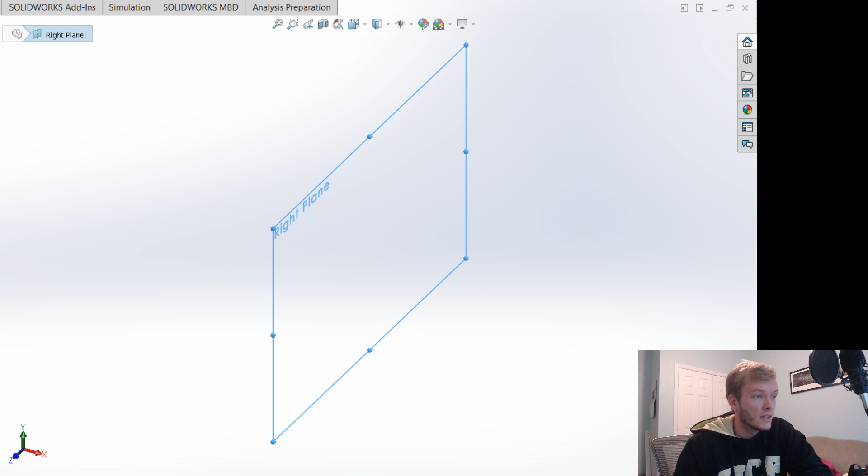So I'm going to go with the right plane to start us off. It's been a little bit since I've drawn anything in SolidWorks, so I'll have to get back into the swing of things, but it shouldn't be too difficult to get back on par. A lot of this is going to be fairly subjective - sometimes I'll measure just for proportionality's sake, but I need to make sure the proportions of the individual ships are fairly similar, which shouldn't be too hard.

What we're going to do is work this way. If I'm looking correctly at the dimensions, it looks like it's about the dimensions of a 2x4. 2x4s, if you don't know, aren't actually 2x4 - they're like 1.5 by 3.5. So we're gonna go 150. This is millimeters I believe, but we'll keep it that way, because base 10 is so much easier to work in.

It's probably gonna be a bunch of cuts and whatnot to get there. So we'll go ahead and extrude this, to see the actual distance. I'm thinking we're gonna go with just 350 as well, that way, to start it out. I'm debating whether I want to do that mid-plane, but I think it won't matter in the end.

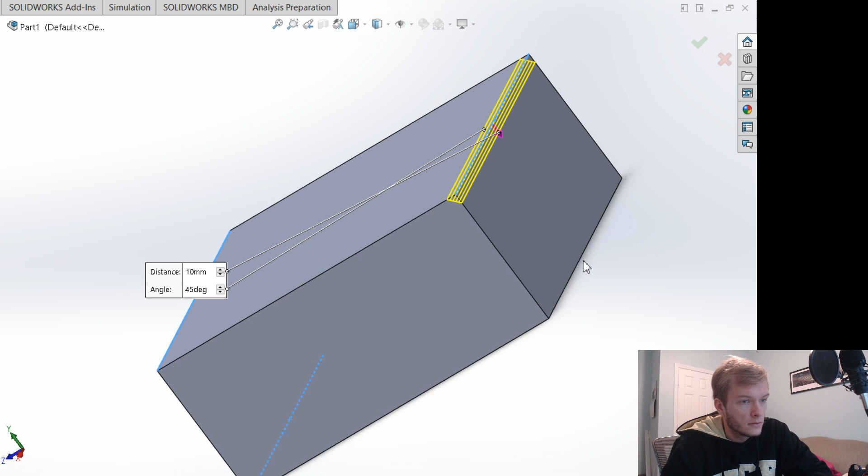That is pretty much where we are. So then I'm going to go ahead and take my chamfer tool, put one there, there - want to show full preview. Yeah, we're just going to crank this up until we get a point.

Do we need to go... so it's going to be 75. I should have just done the math on that. Okay, that's starting to look good.

Just trying to... I have my recording software over here next to it, so I can actually see pretty much next to the picture how it looks. So that's probably a good thing.

And then the front part is going to be the really weird part for me, and I think that's something we're going to have to mess around with. But the wings shouldn't be too bad - it's fairly flat in the back. Maybe we'll get the cockpit in here just to start it out.

So we're going to sketch on this surface, going normal to this surface. Alright, grab a corner to corner rectangle - it goes almost all the way to the front. Maybe... yeah, so we're going to do the actual pentagon shape. And I'm assuming the draft of it is also in the back as well, so that's an important part. So let me grab a center line.

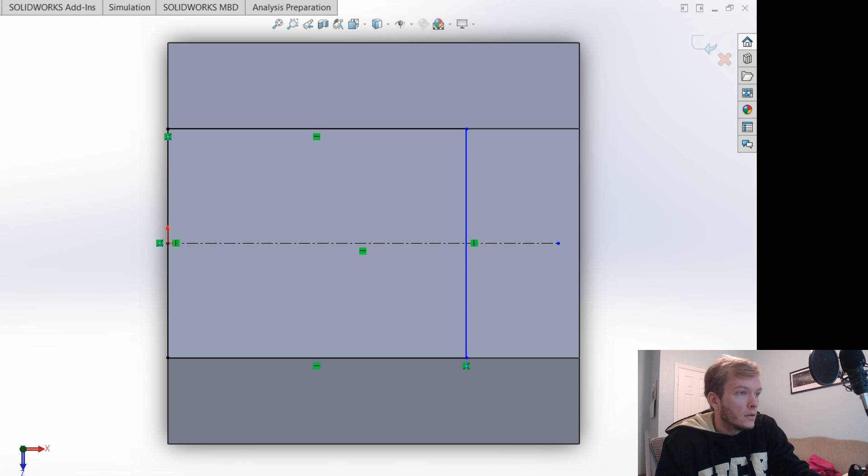There we go. Escape, regular line, there to there, and to there. Okay, I think that needs to be a little shallower, but we can easily drag this like so. Alright, and then we're going to define this distance just so it's happy. So we'll go ahead and make that 50, just to make it a nice number.

And then this distance then needs to be defined. We'll make that 70. Okay, so then everything's defined. It looks like we're going up about half, or maybe let's call it a third, the height. That'll give us a nice 50 extrude. So 50 millimeter. We're going to extrude that, and that for 50.

And then we also need to draft this guy inwards. So the front draft looks like it might actually be a little heavier than the rest of it.

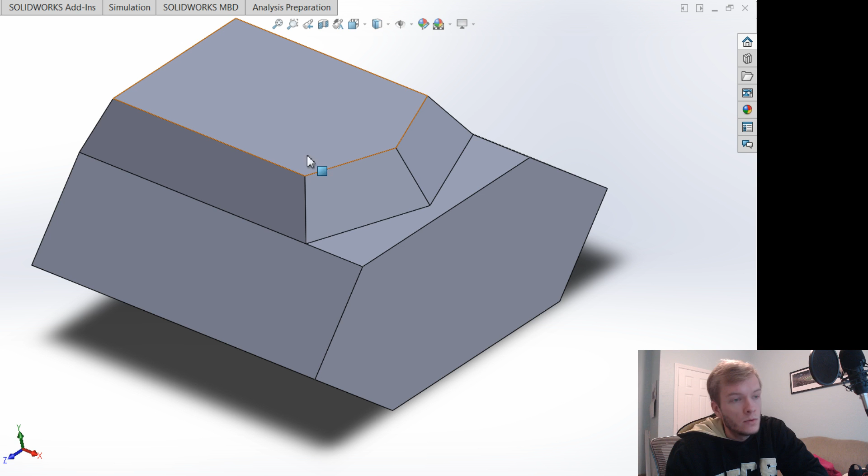And I think, so there's a cut on the front of this. We're going to leave it like this, I think. So we'll save that. So if I rotate it like that, that is actually looking pretty nice. So I have to get this cut in the front here. What I will probably do for the cut, I can't tell if that's really aesthetic or if that's actually gouged in there, but I'm going to assume it's gouged in.

There's no real need for aerodynamics in space, so sorry for eating my stream fuel on stream. But

So we're going to make a plane. It's taking its time. We need to go a little bit further down. 20 actually looks pretty good. So my goal with this is I'm going to draw a line from here to here on this plane. So I'm going to sketch on this plane and just get normal to it for sanity's sake. And so we're going to go.

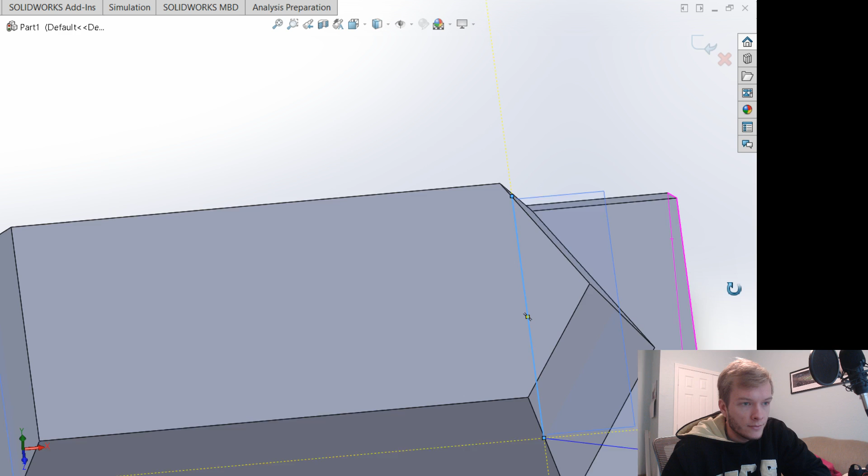Now I want to have it intersect with these, but I need it to be actually on the right spot of that plane, just for how I want it to look. So let me get this back to normal.

You can probably hear my dog barking in the background. What just happened? Alright, we're having some technical difficulties.

Alright, so we're gonna have to get this guy to be right where we want it. There we go. Pierce is what we want. Okay. And that should be at that level of 20. And we're actually going to extrude it downwards. We're going to extrude it, cut it downwards, but we're actually going to draft it as well. So let me get an angle on this.

It's really weird without the spatial manipulator mouse, just using the regular mouse. I had an internship where I was working with Solidworks, and I had the spatial manipulator mouse, but it's a big step changing from that.

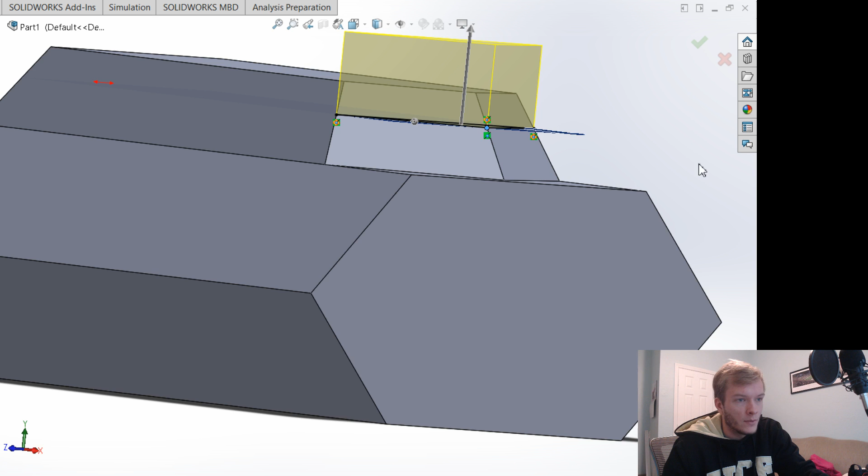So we need to flip that out, flip the side of the cut. I don't think anything changed, not sure why. Oh, no. Blind. Why are we doing that? Flip direction of the cut. Why isn't it flipping? Yeah. So I need this to... I don't know if that's going to work.

You know what? There's a better way to do this. I shouldn't have done it on that plane. Okay. We're gonna go. You can always give up. Alright, we don't need that plane either. So we're gonna do it on this one. So let's get normal to here. And then we're going to draw a line from there to there to there to there. Does that look like what we want it to? Probably. I think so. So let's make this some nice dimensions.

We said this was going to be 10, I believe. No, I don't like that. Let's make it 20. Yeah, okay. And then we're gonna make this guy here. We'll just make that one 10. Alright, and so that's defined. And we should be able to just cut it straight into the ship. So I think it's going to cause some problems, and that might be something that we need to deal with.

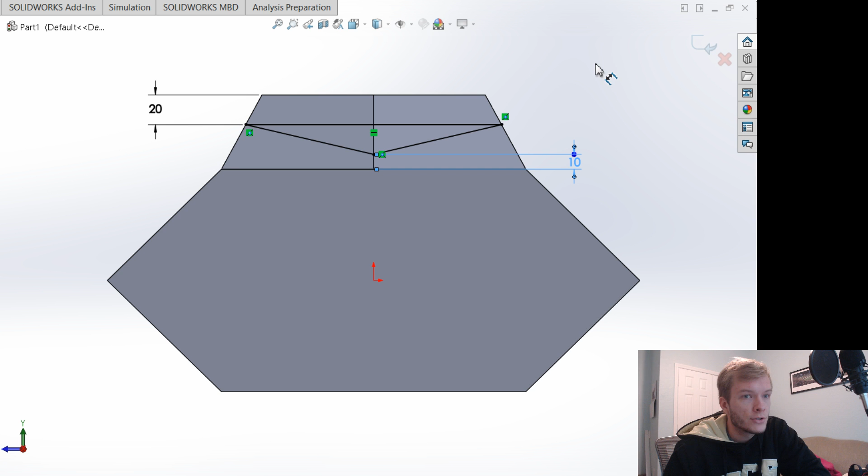So we'll see if it gets there. I need to make sure that it doesn't cut once it gets to this flat part up here. It needs to stop at that point. So I probably could make a plane for that to stop it, but we're going to cut this guy. We're gonna drag it.

Can I do... No, that's gonna go all the way through it. Up to vertex. I think that'll work. That'll look okay. There we go. That's actually looking really good. That's exactly what I want.

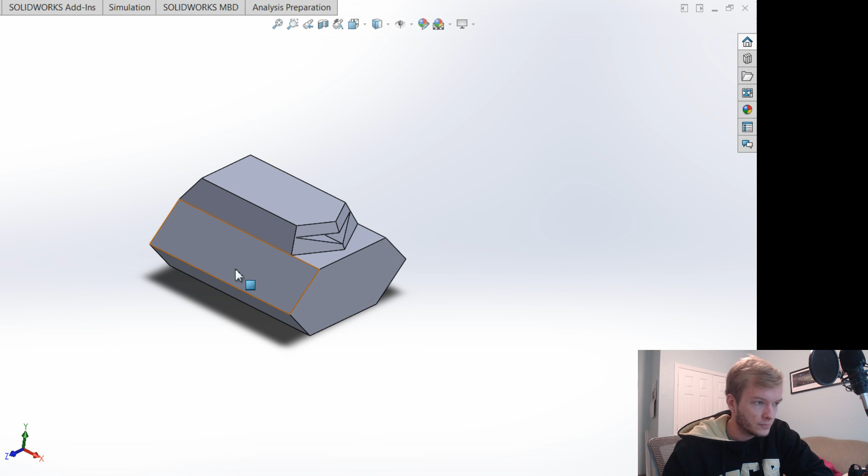So like I said, this front part is going to be really weird. I guess we can leave that for last, because it's basically going to be a bunch of extrudes all coming from this plane here. We should be able to make the wings fairly easily. Where's the front plane go, right down the middle? Yes, it does. Perfect. Okay, so we need to... We can probably do it on the front plane. I'll just have to play around with it.

No, actually we can't, because of the way that it sits. So it sits nicely on the back. I guess I could do it and then lop it off later. That wouldn't be too difficult to work with. Yeah. Alright, we can do that. So let's go to the front plane. We're gonna get normal to that. And basically what we need to do is we need to make the wing too big.

So the wing is a... it's kind of like a hexagon shape if you look at it the right direction. So it's gonna take some playing around with. So I'm gonna leave it undefined. So I can probably make this a little bit easier on myself. So we're gonna get some sort of... Okay, we're gonna delete that for one. We're gonna get a center line in here.

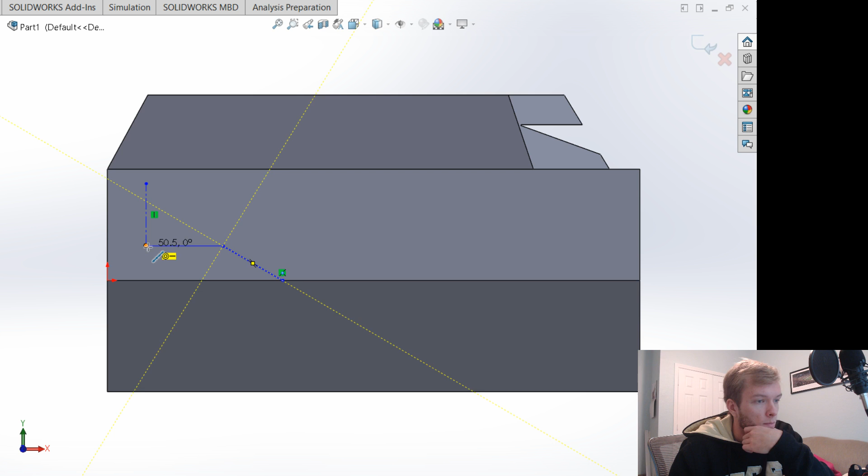And so let's bring this from here to here, and we're going to do a bunch of mirrors because it's symmetric. Mirror entities to mirror about this guy, good. And then mirror entities to mirror all of these about this guy. Good. So if I move this, no, that's not how that works.

And like I said, we need to make this too big. So it looks like it goes to about half the distance of this. So let's grab that center point. I hit escape instead of control. Make those coincident. And so it's gonna be, if we do it this way, it's gonna be a little bit less than half. I don't think that's the worst thing in the world. Yeah, we'll live with it.

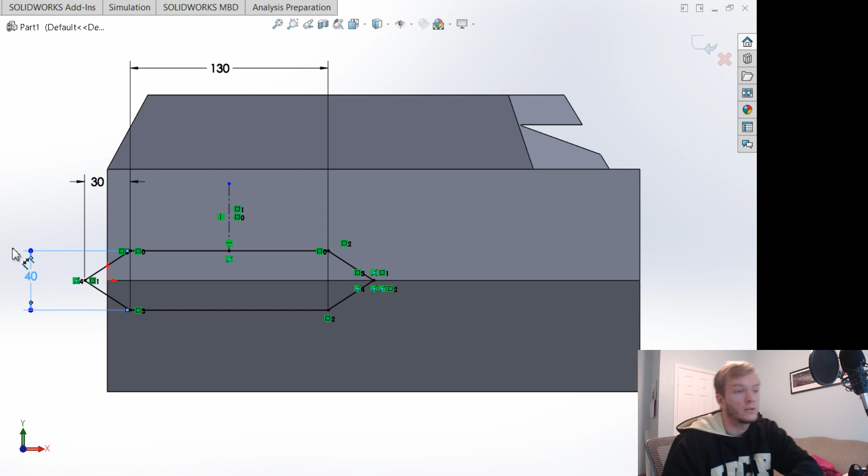So let me just get this extruded. So we're gonna get these situated. Let's go 130 to start it out, and then this is going to be 30, and that is going to be 40, and we'll just see how this looks. So let's extrude this. It's going to be mid-plane. It's going to be drafted. Not nearly as much.

This is going to be, I think it's going to be 3 times as wide as the entire body of the ship itself. So 3 times as wide. It's going to be 350 times 3, so 1050, and then we gotta crank down these degrees until that happens. But I don't think that's enough by itself. So something like that.

I think the problem here is that we need a bigger draft in the width department than we need in the length department. So it's sitting about where we want it to be. But maybe what we should do is we should just draft a rectangle, and then we can put some chamfers on it. I think that's a better idea. So we're going to cancel this, go back to our drawing. So we're going to delete that guy, delete that guy, delete that guy, delete that guy.

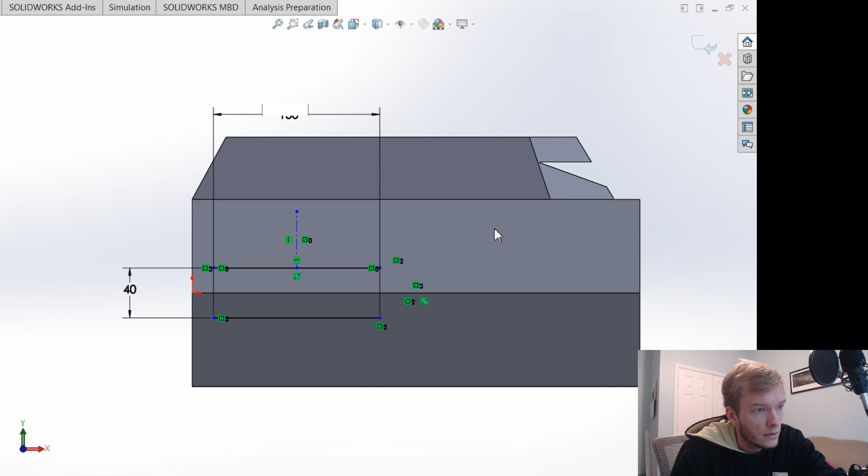So we need to delete that while we're at it. Okay. And then finish out this rectangle. Make that coincident. Drag this puppy out here. I guess we're gonna make it like 150 now, or 200. All right. So now that's defined.

We can extrude that the way I was doing it before, where this is gonna be 1050. Enter. Mid-plane. We need it mid-plane, because it's midway through the plane. Then crank this down. Alright. That's starting to look like we wanted it to. And then we're gonna shove a bunch of chamfers on it. So I think that's about what we want.

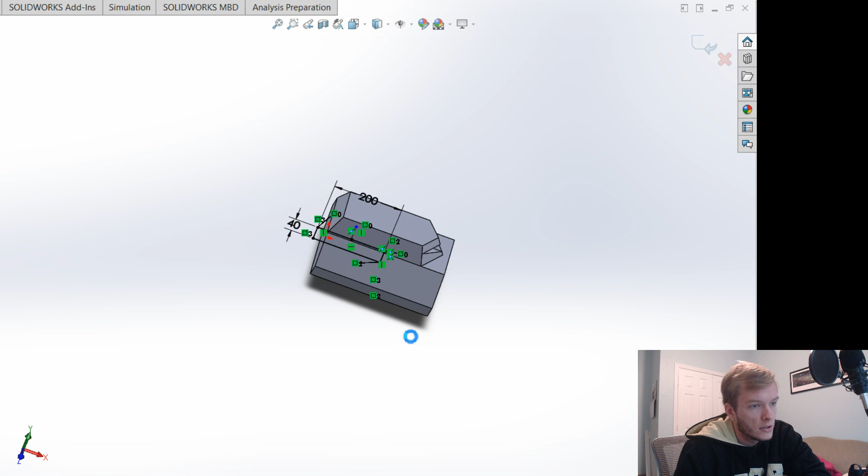Yeah, we may have to do some extra cutting to this, but we'll see how this looks. So it does look like we need to shorten it though. So we're going to save it, but then we're going to go back into it, edit sketch. This is going to be 190. What we're looking for is we want this to be lined up with this here. So we gotta just keep edging off until it lines up the way we want it to. So this is gonna be 185. See how that looks. It's closer. It's real close.

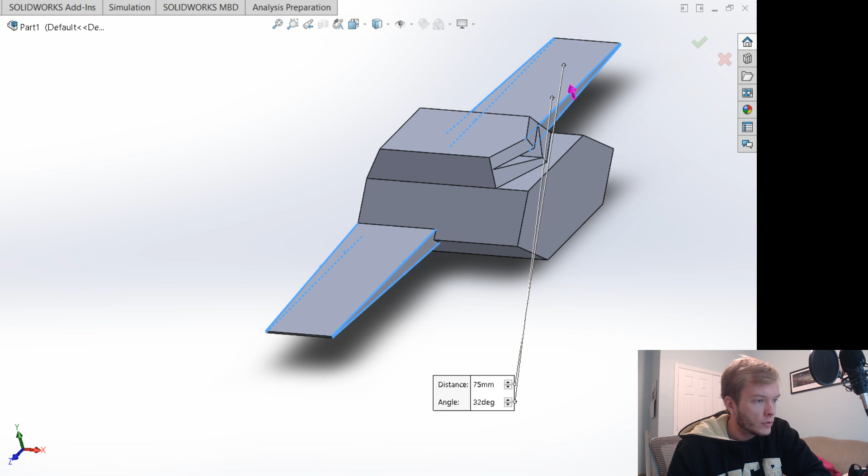Okay. So it doesn't look like it's 45. Looks like it might even be a little steeper than that. Or, I guess, shallower. So we'll go to 30. And then we gotta crank this all the way down. I'm realizing I might need to make the cuts before I do this. Okay.

I wonder, I can probably draft just certain faces. That would make sense. How does that look? Not nearly how we want it to. And also, that doesn't line up. What's wrong with that? Is that on all of them? Yeah, that's weird. Alright. Now, correct me if I'm wrong, it could be flat. I think that could be something.

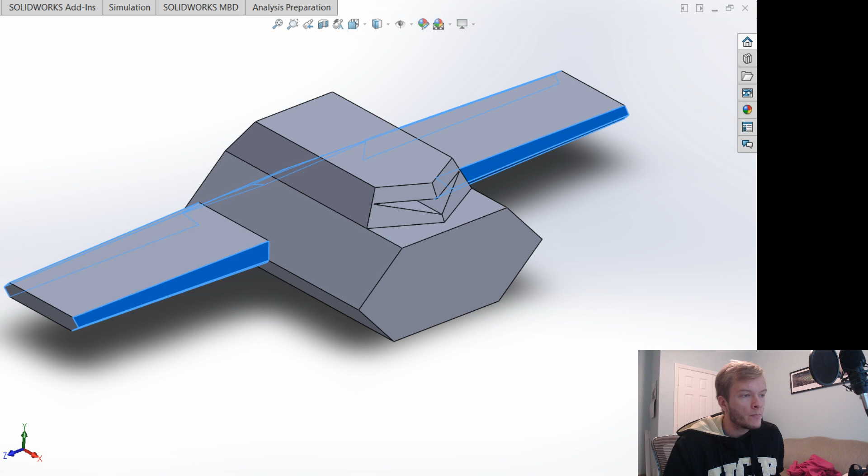Okay. So, screw these. Completely remove the draft. All of it. We're going to go to surface there. And we're going to cut. We're going to like draft outwards. It's gonna be interesting. We'll see how it goes. Okay.

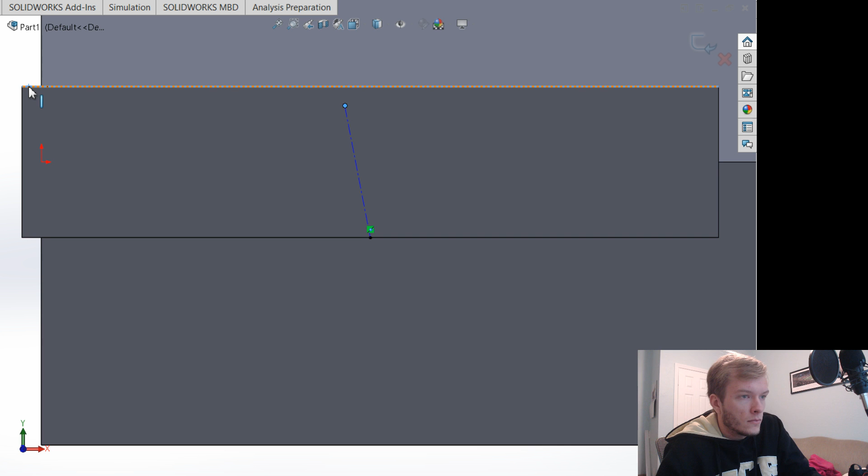Alright, we need to make this as skinny as we want it. So I'm gonna start with. Well, let me get these center lines in here. What? Okay, there we go. So that's there. This goes here. There we go.

And so what we're gonna do is we're gonna get this box into the sketch, and then we're gonna get, we don't want that. I might have to make just a huge box. Yeah, we can do that. Yeah, I'm just going to leave that undefined so I can mess around with it if I need to. Because the goal is I'm going to shrink it in and have the hole in the middle expand outwards.

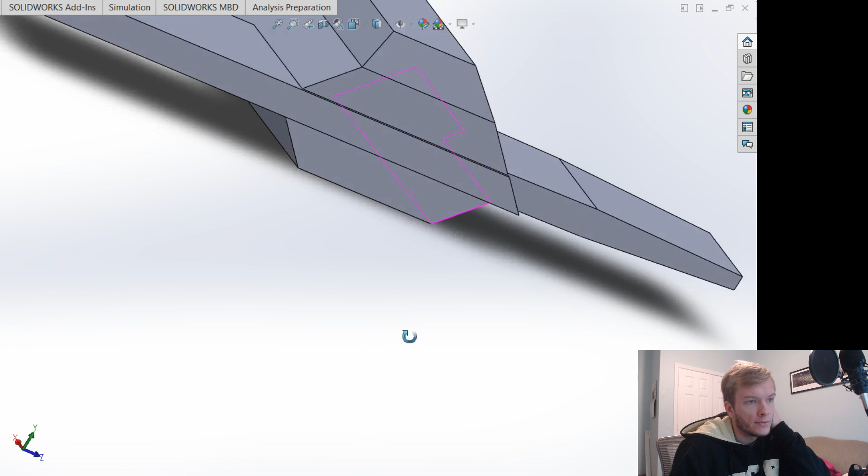Okay, so like I said, I have to do this twice. But that does look to be what we're aiming for. I don't really like that line there, but something we're gonna have to live with. Okay. All right.

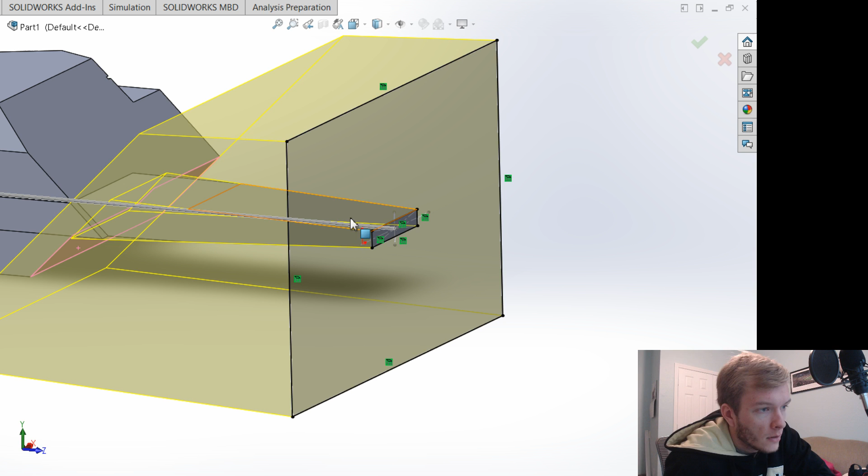Okay. So this will hopefully get me the other side. Okay. That's one wing down. And maybe we can even help it out on the other side. But I'm gonna get the chamfer in. And then we'll just copy the whole thing over to the other side. Ooh, that's what I could do. I could, yeah, I'll do that.

So this whole boss extrude, we're gonna go back to it. We're gonna cut this number in half. So that's gonna be 525. And then we're gonna go blind. Keep it that way. Go back into the feature. And we'll just work on it on this side, and then we'll go over to the other side and figure it out from there. So I still don't like that angle, but I can't really think of any better way to do it. It's considering this all one thing, so maybe we can work with it.

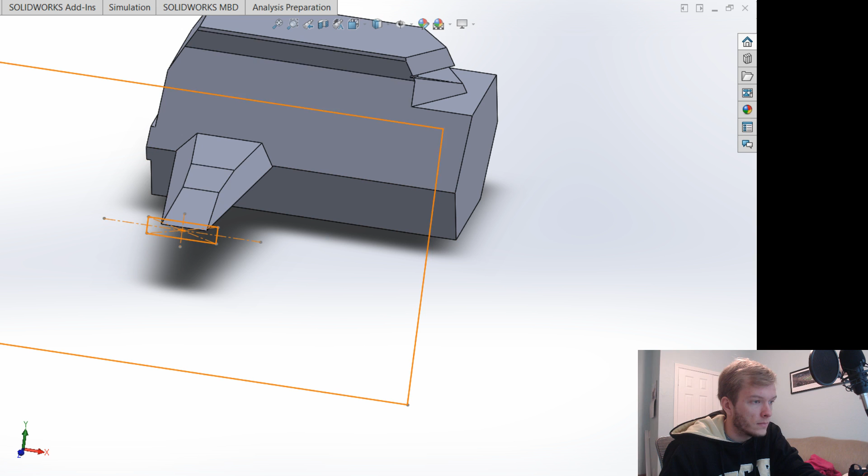We need to go a little steeper. See how that looks. Makes me think that this cut could maybe be a little bit steeper in a sense. Okay. So if we make this 50, then we gotta make the cut extrude wider.

What? Oh, these chamfers are messed up. Okay, we're gonna delete the chamfers and redo them. I'm working on it. I'm gonna make this 6, right? 6.5. Nah, it was 6.5. Okay.

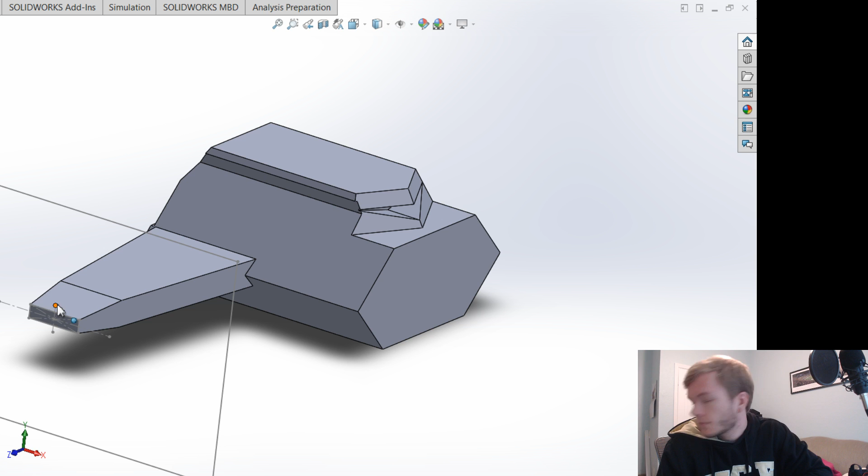Okay. And hopefully this will get rid of itself when we go to do the chamfers. So, okay.

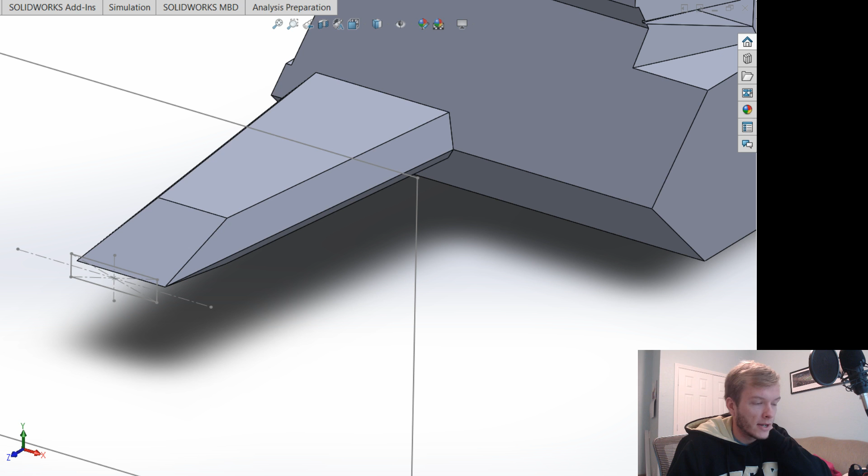That's what we're looking for. All right. I think that's about as good as it's gonna get. What could I do? I can crank the chamfers up a little bit more. Actually, I think what I can do is I can go to this guy, sketch, make that just a little bit smaller. So if we make that 60, no, we need less than that. So 55. Okay.

Okay, and then so on these first chamfers, I think we need to make these go deeper.

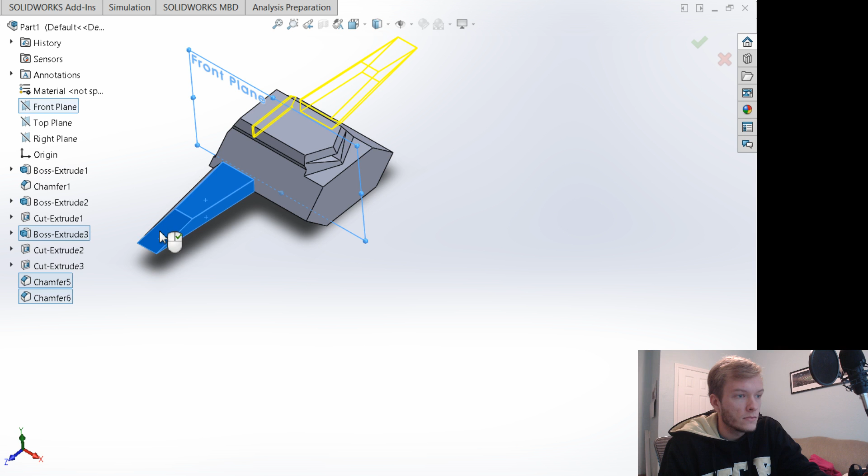Feature to mirror, we are going to get that. I'm just gonna click on all of them. Oh, so it's already got them. Okay. Let me see how that looks. Rebuild errors. Okay. What's going on here? Okay. I guess we're just going to have to recreate these chamfers on the other side. I don't know what's going on with that, and I don't feel like dealing with it.

So this is 254.2 at 1 degree. Oh, that's why, okay. I can't make those chamfers unless I have the cuts. So let me go to this mirror. So I need the cuts and the chamfers. There we go. Still causing problems. Great.

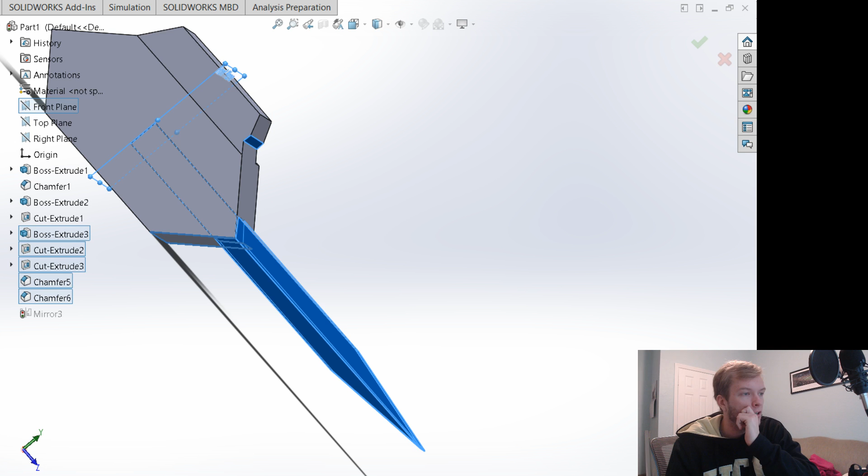Oh, did that actually cut a little piece right there? That's annoying. I didn't even realize that. I mean, it doesn't look that bad, but it's not what we wanted. Let me go back to that spot. Okay, so that's where that happened.

So this needs to be, if I go to the sketch, if I drag that in a bit, does that still work? Yeah, that still works. Alright, we're going to delete that mirror. Don't know why it's causing so much problems. Front plane.

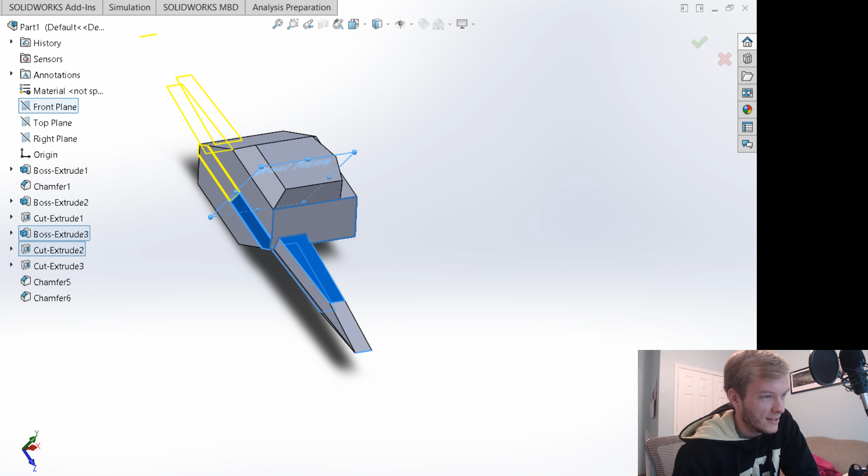Okay. I guess I could just go through and recreate all of it. So let me just mirror the one thing that works. Can I mirror some of the cut extrudes? No. No. Okay. Well, we're gonna just go do it on this side, I guess.

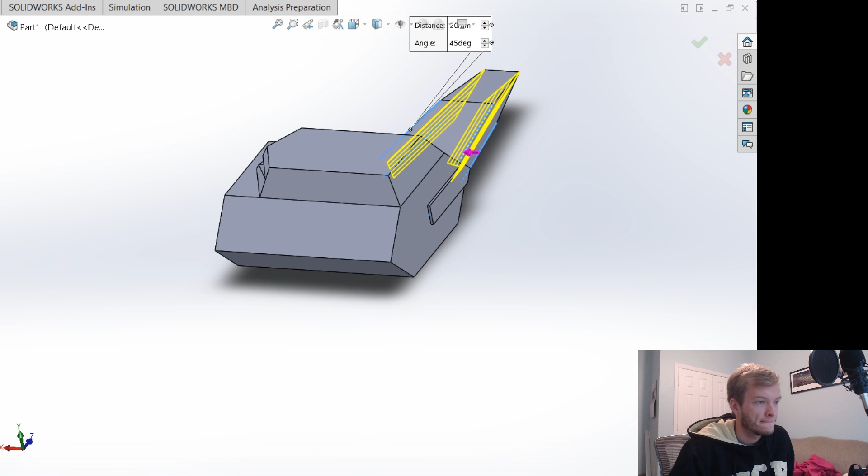That one's stupid, so let's see, what was that? That's 554.2 with 1 degree. Oh, luckily it kept it. That's nice. Okay, and then we'll go get this one. 20 with 45. So chamfer.

Right. What do you think so far, Cicada? Is that looking like it's starting to fill out? I just got to get the front on, which is going to be a little interesting, but we'll see how that goes. It's going to be a lot of angles. Oh, I gotta take that off the back.

Why can't I sketch on that? I'll go to the bottom. Oh, I'm in a sketch.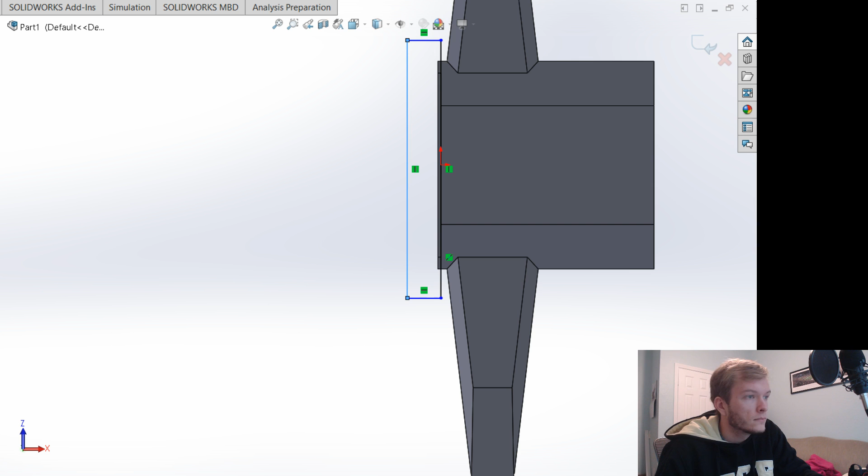Okay. Don't need it to be that much, but I can probably go 100. No, that's 10. Yeah, there we go. Clean that off the back end. There we go. Just realized that the picture I'm looking at is almost a perfect isometric view. That's pretty nice.

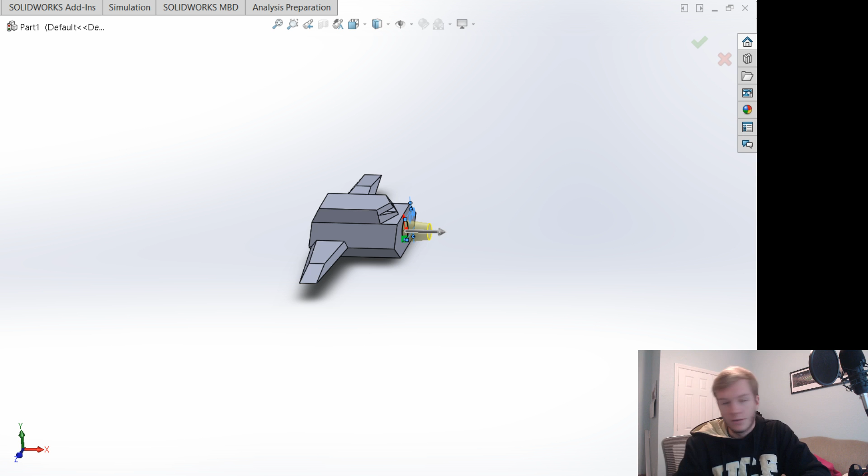This front part is going to be a mess. You can put that big horn on the front pretty easily. It's actually a decent decline. I'm gonna have to make this longer though.

I'm gonna make this 4. Up to 600. Okay. So now we need to sketch on here again. So I'm trying to get some comprehension of this. It looks like what I can do.

Debating whether I should make like a big piece and then cut away from it. I feel like I have to. Like it's gonna be a bunch of different extrudes and cuts to get here. We can make that middle part maybe. Yeah, that looks easy enough. It's kind of menacing.

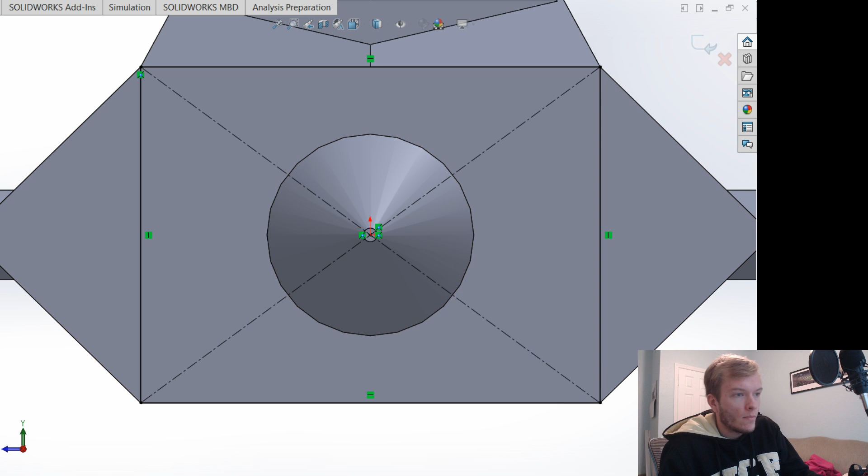So that's 600. We gotta go like 250, maybe a little less. And then crank that up.

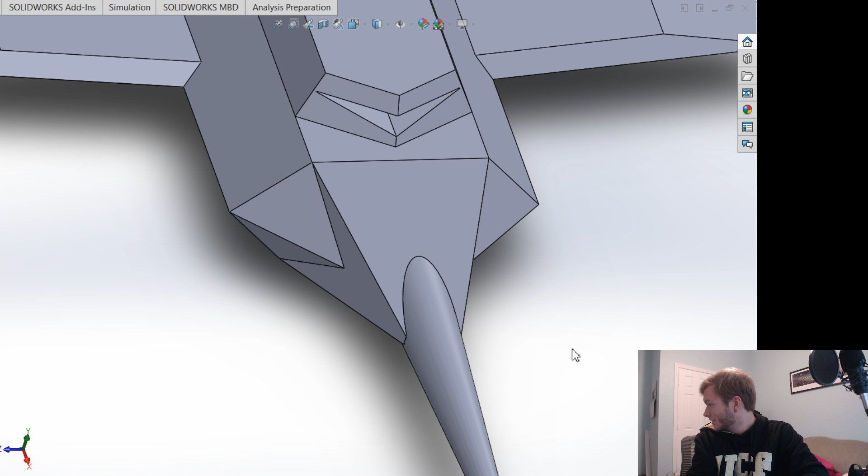It's going to 200. We want it to go to 200? No, we want it to go to like 100. And then crank it in more. There we go. Is that? Ah, so close. Should have just gone to 40. That would have been a nice number. That's already starting to look like what I wanted it to. But there's still some weird angles on this. Maybe I can get away with some chamfers.

Oh yeah, yeah. I don't know, man. I'm hoping that there's nothing stopping them from getting home with it. But I guess it did take a lot of damage.

Yeah, let's go for the. Okay. Why is that? Why is it cutting into over there so much? What is that doing? It's something I could do.

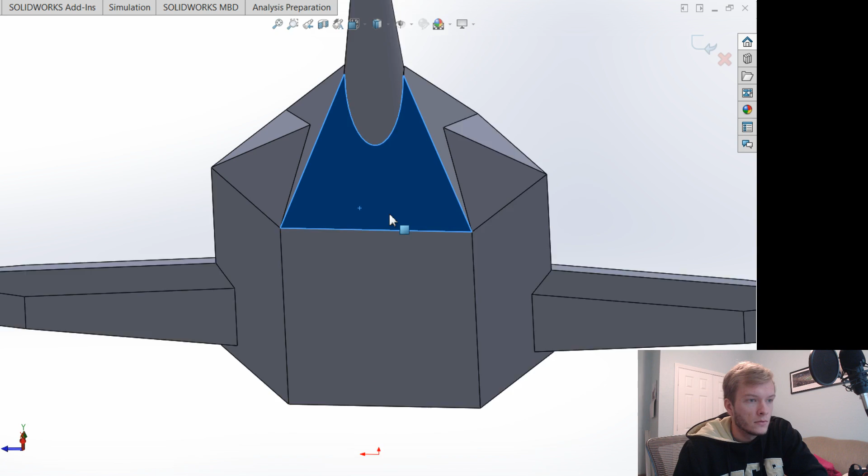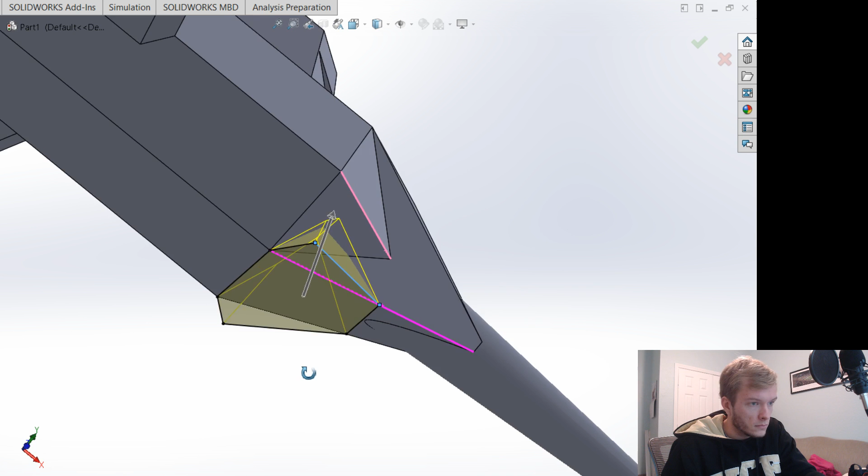It's almost like I need to sketch on this plane. I don't know how this is gonna look. No, I don't like that.

I actually just Google searched the most recent episode, or I Google searched Sun Incinerator or something, and I have a little image that popped up. I think it might be because somebody's taken out the background, so I don't know if that's something that was used on the wiki, but I think I might end up calling it here because it looks pretty close, and I don't know that I can understand the angles from just the image that I have, so may leave it up to someone else to continue the legend.

But I gotta say that I'm pretty satisfied with how it turned out. I can do a little turn. So I wanted to try and do the rest of them. At least the big one, Emerald Ship. So let me save this one off. I don't know if it's dangerous to save something as Sun Incinerator on my documents, but we'll cross that bridge when we get there. Alright, so I'm going to leave that one open. We're going to go to a new one.

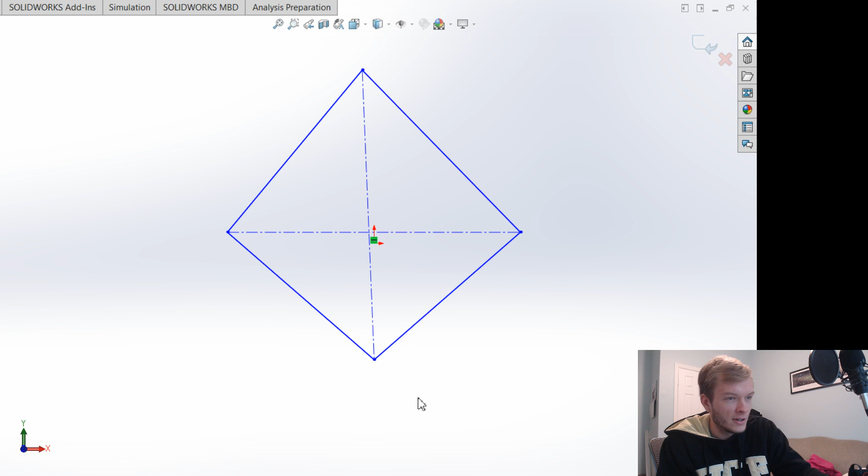Alright, from my perspective, this looks like a square, so that's what we're going to do. Alright, so the previous ship was 150, so it was 15 centimeters tall. For scaling purposes, we're going to make this one massive. So, this one needs to be like 20 times that. So 3,000?

Oh, hold on, I gotta hit control. Coincident. Okay. So that is what we're working with, and then we're going to extrude this. We're going to go mid-plane. We just make this a big tetrahedron. So what's going on here?

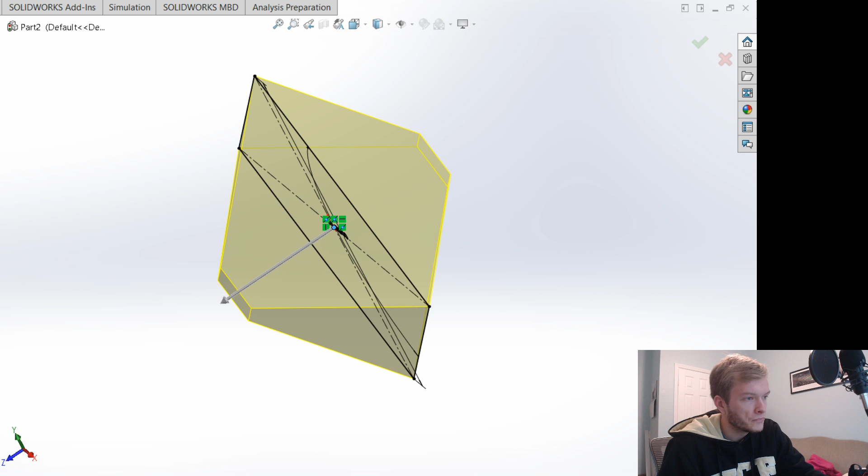Probably do the math on this. Is it going to go out to like 2,000 or something? Nope. That's a... Alright. Don't know what's going on there, but I think this is looking like what I wanted it to. So we'll accept that. Actually, let me look at it head on. So

we're gonna make a plane, not the airplane that I can hear outside, but the geometric plane. This offset's gonna be 1500. And a sketch on that. Looks to be about maybe a third of the way down. So if I get a sketch out, we're gonna go like that.

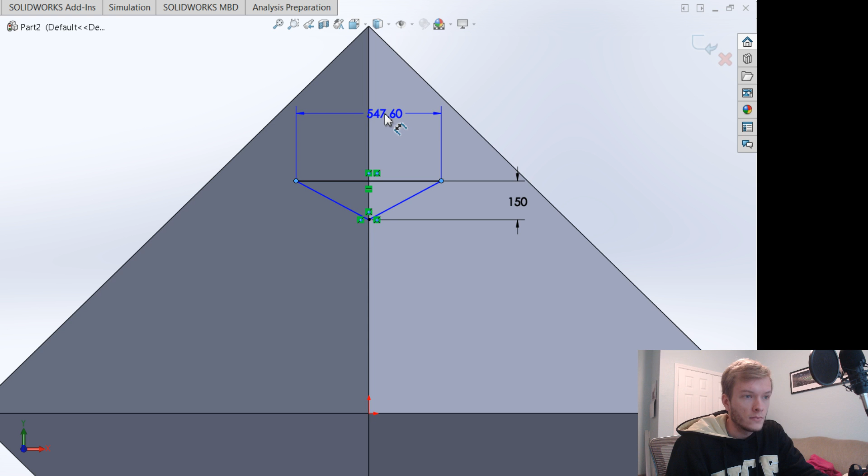Alright, this one, we're going to make that coincident. And then I'm just going to make these reasonable numbers. So I think that one's good. We'll call that one 150. And then we're going to call this one... we need to make it a little bit bigger, so let's go to 600. Alright, so we'll extrude cut that one. Just need to make sure it cuts into it.

Okay. If we go like that, then we get that shape we were looking for. Yeah, we'll try and make this a nice little scene when we get around to it.

Okay, so the arms are going to be a little interesting. Trying to think of how I want to do this, because they're at 45-degree angles, so from the normal sense. So I have to make, I'm gonna have to make a plane.

So if I go to the top plane and I make it... if I make it well, we're not gonna move it, we're gonna rotate it 45 degrees. And then our second reference is going to be that point, and our third reference is going to be that point. There we go.

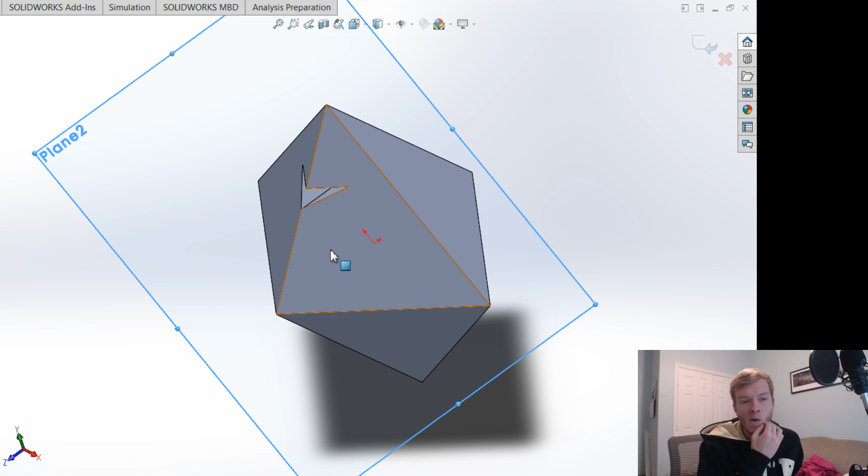Are you saying it's like less steep in the back? Because I know it's got the arms on the back that are the weapons. Yeah, maybe I can do that, maybe I can cut a little off the back. Because right now that's what it looks like from the side. Part of me thinks that it should be a little bit longer in the front. Maybe I can work with that.

Let me... oh, I gotta... Alright, it's gonna be symmetric, and then I'll have to.

Oh yeah, probably doesn't let you send a link or anything. You might be able to message it to me on Reddit if you had the Reddit thing.

There we go. Oh, I probably could have guessed that. That's a normal thing.

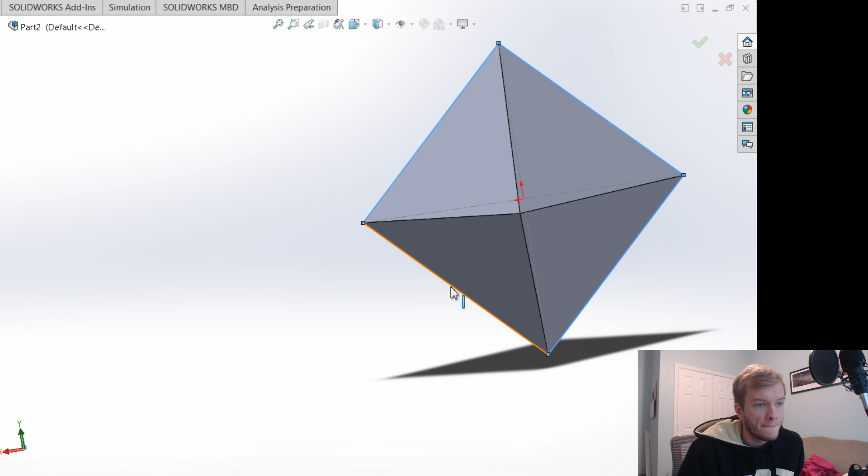Extrude cut. Gonna draft it. Oh god, draft outwards, please.

Like that, that's what I was thinking.

I just saw the Reddit thing. Alright, yeah, I'll check that in a second. We're gonna go to 50. Alright, yeah, I'll go check out this picture. Hold on.

Oh yeah. Okay, so it's a lot longer in the front. Yeah, you're right, I still think there should be a little bit in the back like this, but what I can do is I can make it a lot longer the way I did it.

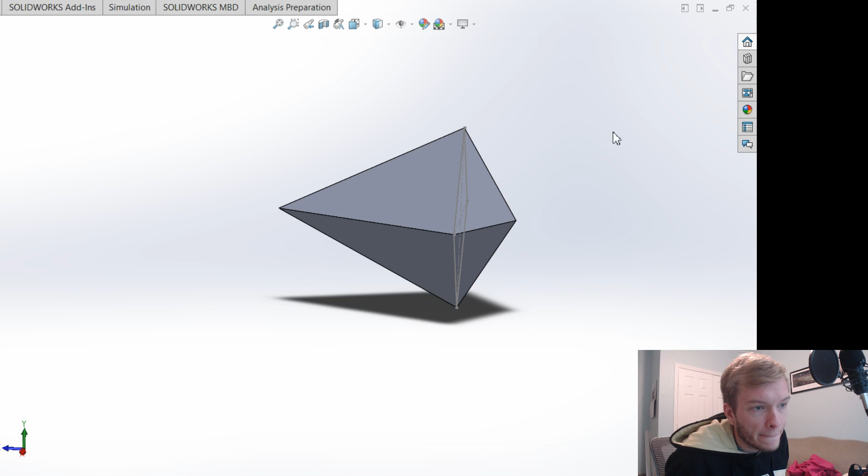Does that look better? I think that looks better. That definitely looks more aerodynamic, I'll give you that.

It's pretty menacing. Plane 2 is having some problems. Oh, because that point's gone. Yeah.

Alright, we're back. Okay, so I think I can get that out of there. And so what I'm going to do is I'm going to make one arm, and I'll try to rotate it around. That would make my life easy, but I don't know if that's going to work out. So I think it's going to be just...

Don't know what that was. Another message.

Oh wow, that's a nice back view. Okay, yeah, yeah, we can add that on. Thank you for the pictures, this is really helpful. Yeah, so it's got like a thruster spot in the back. Yeah, that makes sense.

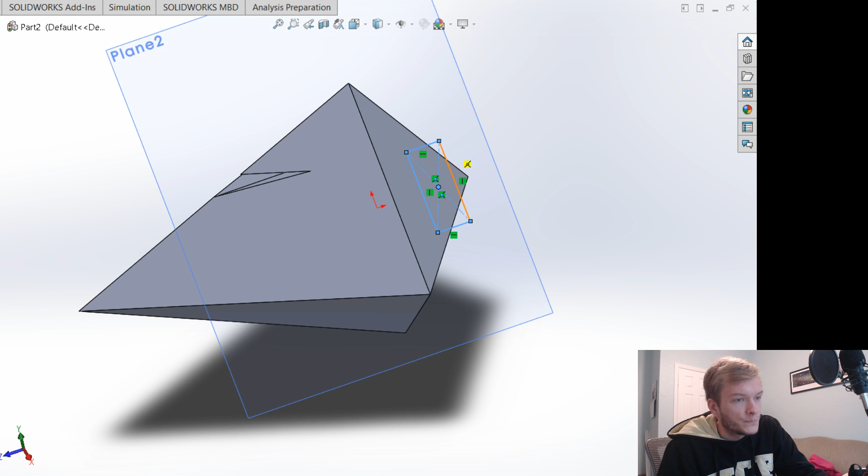Um, okay. So... my name's not Bob.

Alright, so let me just see what these are looking like. Go 150. And then 500.

I'm gonna put a center line from there to there. Get this guy lined up on the line. And then, what does that look like? 250 to me. We can adjust that later if it looks bad, but I don't think it'll look too bad.

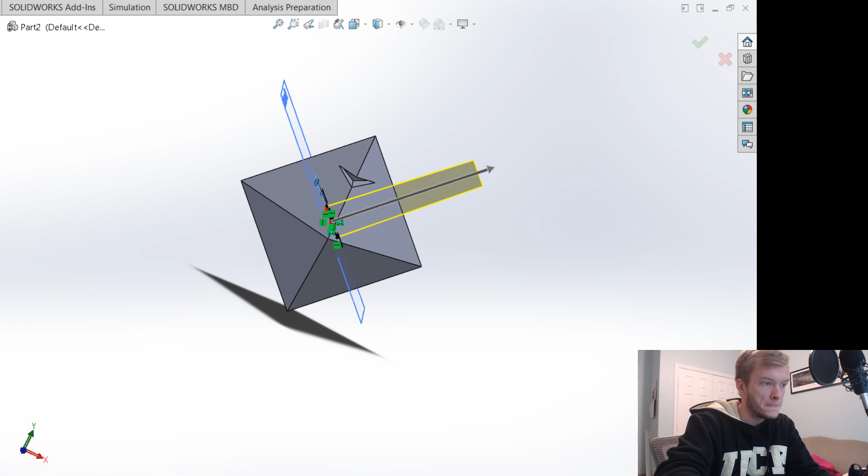Alright, and these go out pretty far. Maybe we'll go back to 1 degree. 3,000. Maybe even more than that. We'll go 3250. Alright, we're gonna live with that for a second.

See how it pans out. So if I go to Control 7, oh, I forgot, I gotta have that weird front view to match the shape that I got. Might even be no, I think that's the right length for it.

Okay. Because the weapons themselves are kind of pointed inwards, so it's a weird angle. To get it, I'm gonna have to play around with it, I think. Yeah, that's what I can do. Let me get that plane angle, second reference. We're gonna make it.

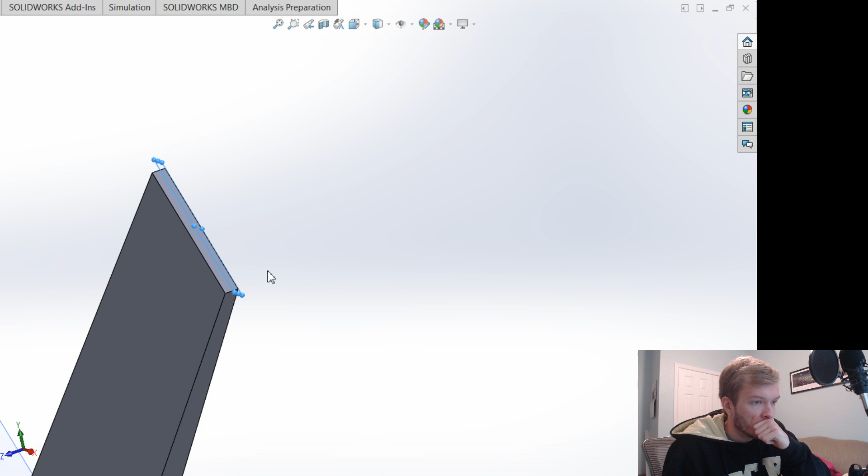We'll go 45. So if I get this here, yeah, if we sketch on this plane, and make that hidden. We'll go normal. Can hear the chainsaws are at it again.

What? There we go. Make that 150. And then the other way, make it 200, not enough, 400, maybe we can go 500, and then we're going to draft it inwards, crank that up.

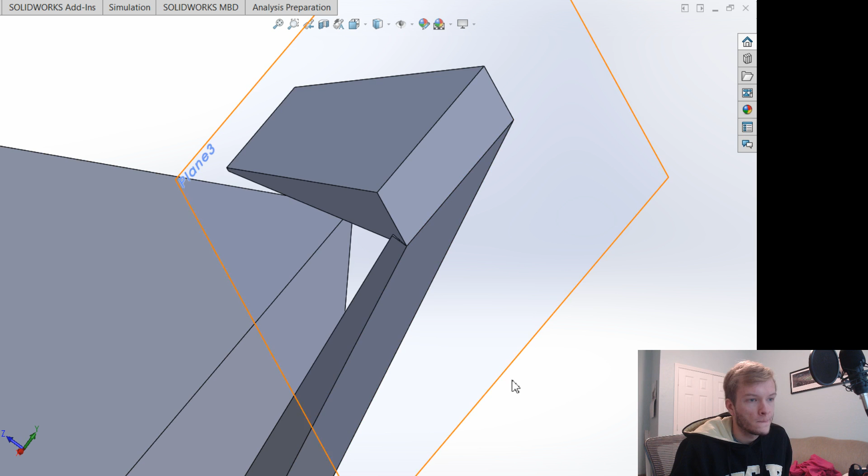So I think that looks like what I wanted it to, other than the fact that this needs to go inwards. So maybe I can cut it. Yeah, okay, we'll do that. From there, there, to there, to there. No, not a circle. There to there.

And then we're gonna not extrude, cut. To surface. That one. How does that look? Oh, I did it the wrong way. Okay.

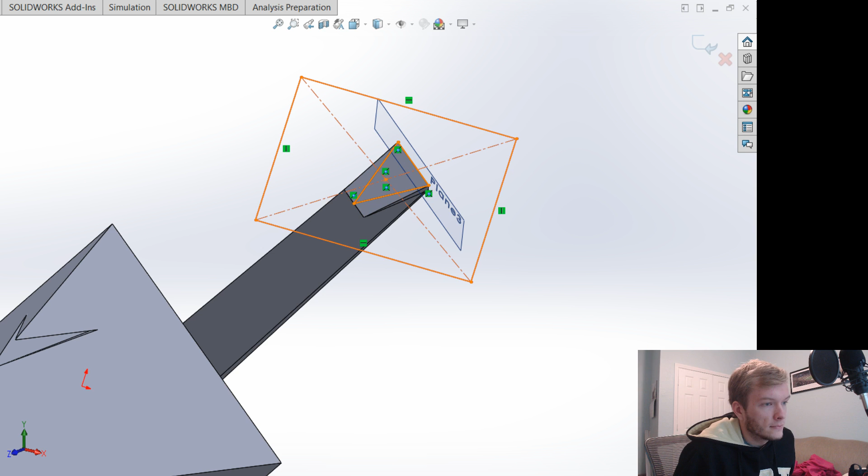Alright, we need to box this guy in. Alright. Hey, it worked. Doesn't look the prettiest right there on the edges, but I think I can chamfer those edges because in the back view it looks like it does have angles on them, so.

Alright, so this needs to be like 100. And then yeah, that looks a lot better, doesn't it? This needs to be less, more. We'll just look at it, how it looks. That looks weird, but I kind of like it. I don't think it's what we're going for, though. I think I need to take some off.

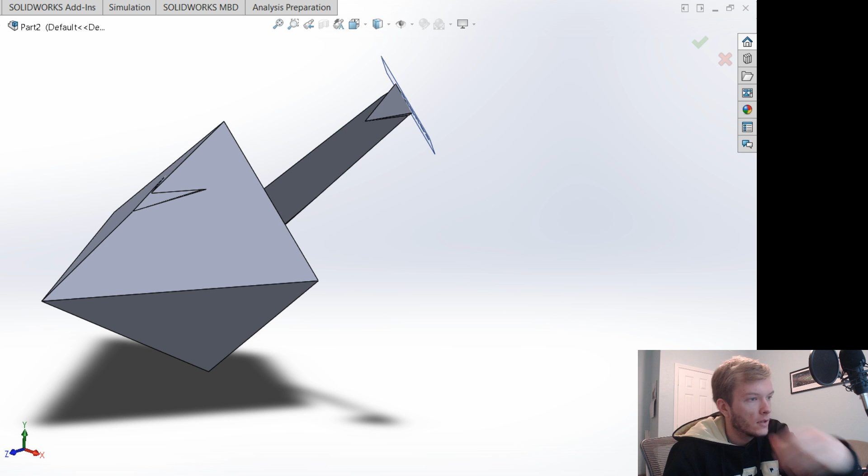I think that looks pretty good. Okay. Alright, let me see if I can rotate this guy around. Let me try and get a center line in here. I'm going for circular pattern, not the chamfer. I need to make the axis for this. I always get confused about that.

Alright, so if I go circular pattern, about that, and then alright, we want 4 of them. Why doesn't it work? What's wrong with it? I really don't want to have to do this 4 times.

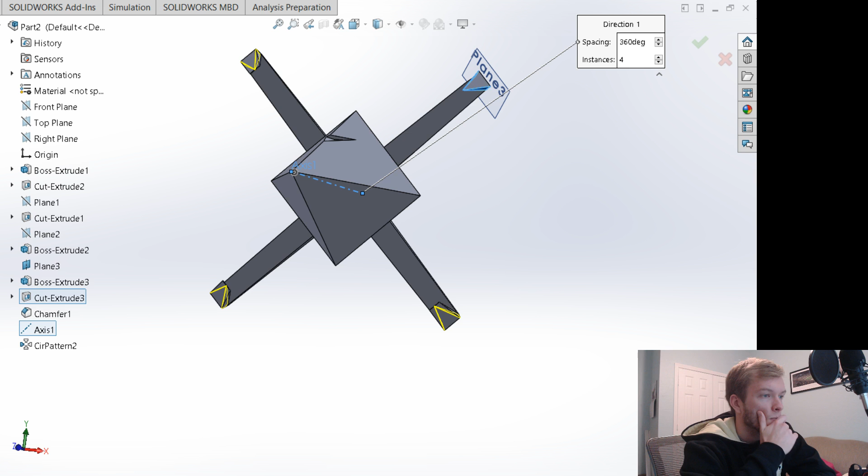Okay, that worked. So what do I need to do? I need to put the cut and the chamfer on them. Can I do another circular pattern maybe and get that? I don't know why it's not working whenever I put them on. So maybe I have to do it in a separate order. End face cannot terminate the extrude feature. Please recreate the feature using geometry pattern option if intended to mirror pattern and feature onto disjointed body. It's not... what? Okay. Well, it's easy enough to recreate what we did, so I'm gonna just do it 3 more times, I guess.

I'm being FaceTimed.

Hey, I'm still streaming. Oh, sorry. It's all good. That was my girlfriend. I'm sure she'll be here in a little bit, but okay, yeah, we're good there.

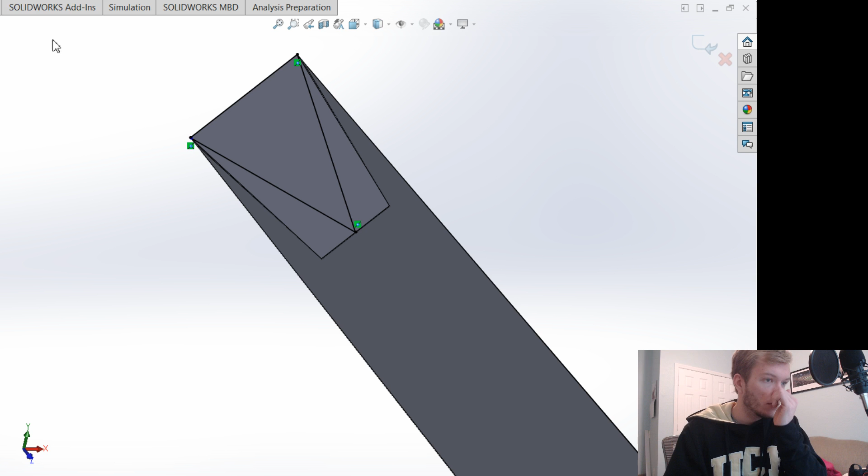Alright, we are good with that sketch, so, oh, okay. So what I did was I did that, that, that, and that. And then I cut it. Oh, no, I need to draw the box first. Extruded cut. Up to surface. That one. Alright.

Yeah, I might be able to go back and fix that if that is a problem. What did I do on the previous one that's not working here? Do I have to do it wrong first? I did that last time. Like that? There we go.

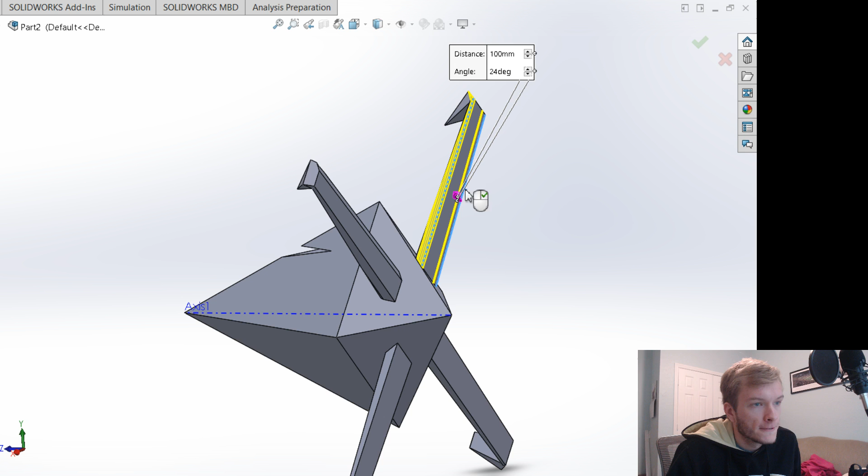And then the chamfer, what was the chamfer? 100, 24, okay. So, okay, that's one. Two more to go.

This one's not giving me any problems. I don't understand. I don't know what was going on with that one. Maybe it was the size of the box I made.

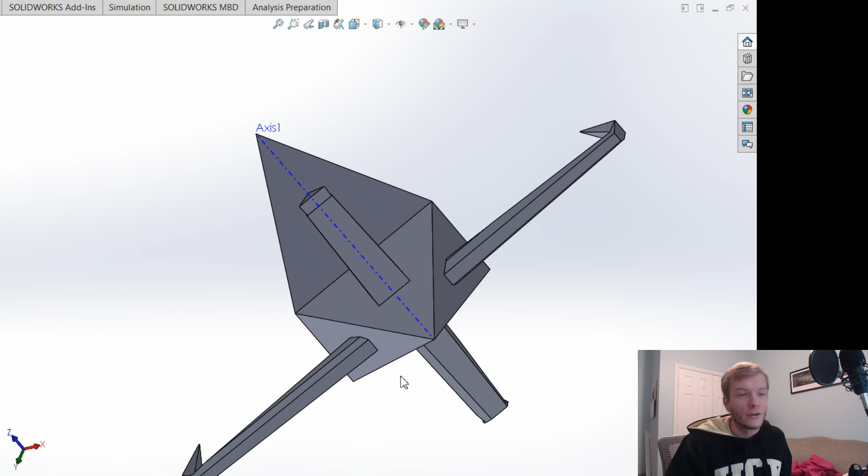Right. Alright, we do need to add that thruster cavity on the back. That actually did give a back angle of the Sun Incinerator, but it's just a bunch of circles, so I don't think I'll... You know what? We'll finish it off by adding those in, because that's a necessary feature for such a fine craft. Oh, not that one.

Okay, so we were saying that the arms looked a little long. Maybe I can fix that.

If I go to this guy, edit... sketch, yeah, edit feature, we can make that back down to 3,000. That didn't ruin anything, I don't think. Yeah, I think that turned out pretty nice.

So I need to cut that, cut the butt off. What I can do is grab the front plane and make a reference plane that's offset in the other direction.

How far off? We need to go like 300? No, we need to go like 500. Maybe a little bit more, 550. There we go.

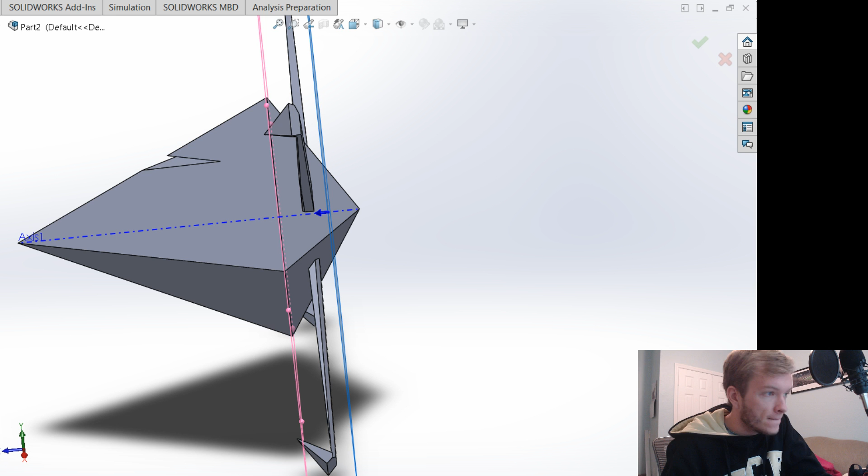So we're gonna sketch on here, go normal to that, other way. Alright, this is gonna be interesting because I gotta get this to line up with these, but also the plane.

I think I can use the pierce tool. Yeah. Alright, that fixed it nicely for me. And we're just going to extrude cut that way. That does it fine.

And on here, I'm gonna... oh, I can make this nice and easy for me.

Hey, we got more people. Michael Harmon, welcome to the stream.

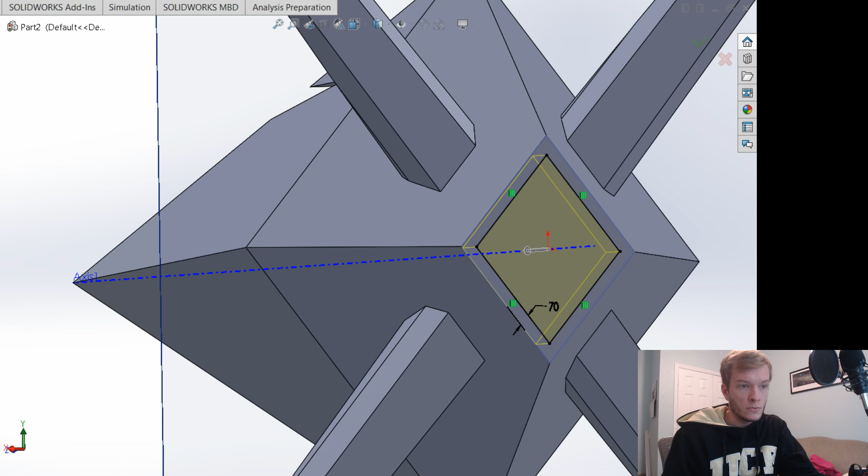Alright, we're gonna crank that down to like 70. Well, in the picture that's not even gonna be visible, but we'll leave it.

I think we were saying we were going to go fix the problem with the, what's it called, the engines on the back of the Sun Incinerator. So we'll go to that. Let me get a nice isometric view, nice pan.

And then we're going to go to the Sun Incinerator. I'm sure we got everything still going well. So from the picture that I was sent, it looks like there are 6 smaller jets and 1 larger jet.

So, like that, and then let me get another circle.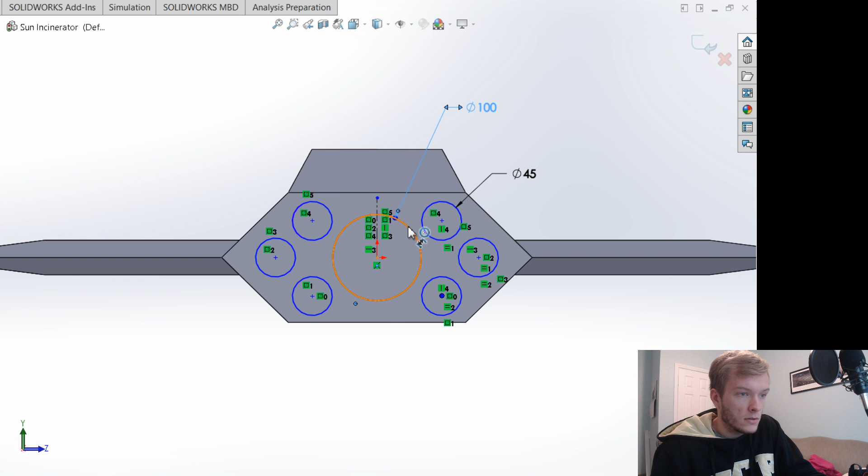Let's make it 45. Make that 100. And then we're gonna make that 70. We're gonna make this 45. We're gonna make this 45. I'm gonna make that 45. And those should be what we want.

So all we have to do is extrude cut all of those. It's only gonna go like 20. I think that should be fine. Alright, so that is the back of the Sun Incinerator.

Let me go save the Emerald ship. I don't know if, do you guys know what the name is of the Emerald ship? I'm pretty sure they said it. Was it a Imperial warship or something? I'm just gonna call it Emerald ship.

Okay, so now we're gonna make an assembly, and that's going to take its time loading. How long have we been going on the stream for? Oh wow, we're just over 2 hours right now. The Destiny Destroyer, that is definitely a nice name.

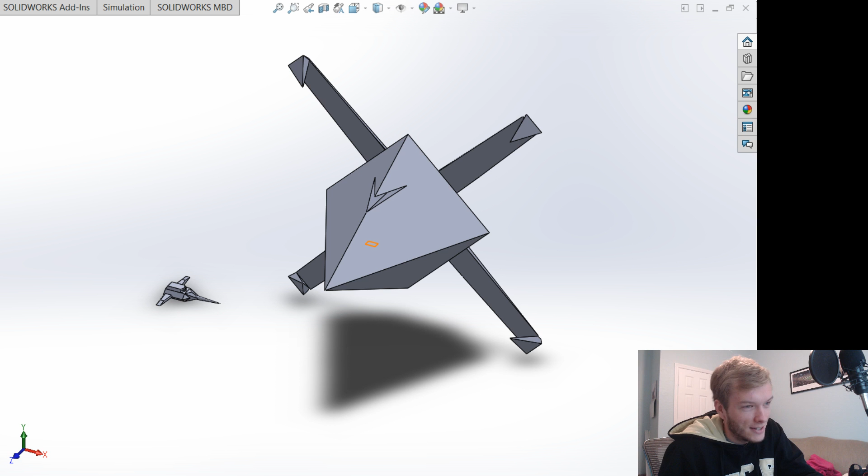Because they're not going to be touching each other or anything, I want it to be like slightly off center. Layout, assembly, where's mate? Mate. Okay, that's promising.

Right. Oh, okay, let me go back to that mate that just happened. There we go.

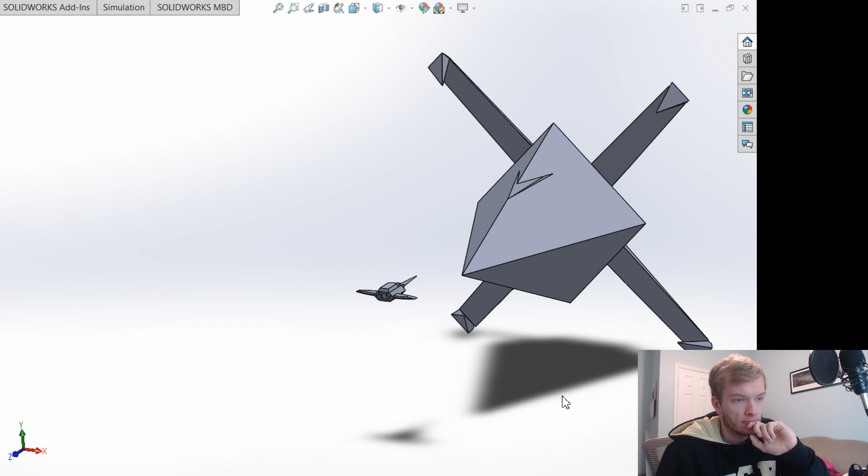I think that looks pretty cool, I gotta say. I mean, if we had that in the picture, you wouldn't even be able to see it at that scale. So, I think that's pretty neat.

Alright, so we got this picture, and zoom out. I'd say that's a job well done. Maybe I can get a spin around here, slow motion.